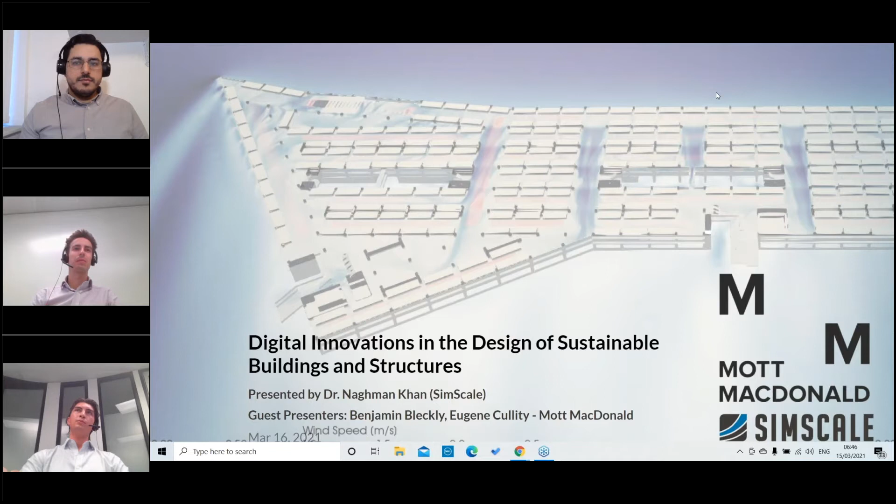But in the past few months, and particularly going into the future with the vaccines being rolled out, I think we're going to see all of that pick up again, because people want to get out, especially governments. We're seeing here in Australia a lot of money injected into building projects, getting things rolling, building infrastructure. So over the next 12 to 18 months, it's really going to pick up again. Great, it's a positive outlook.

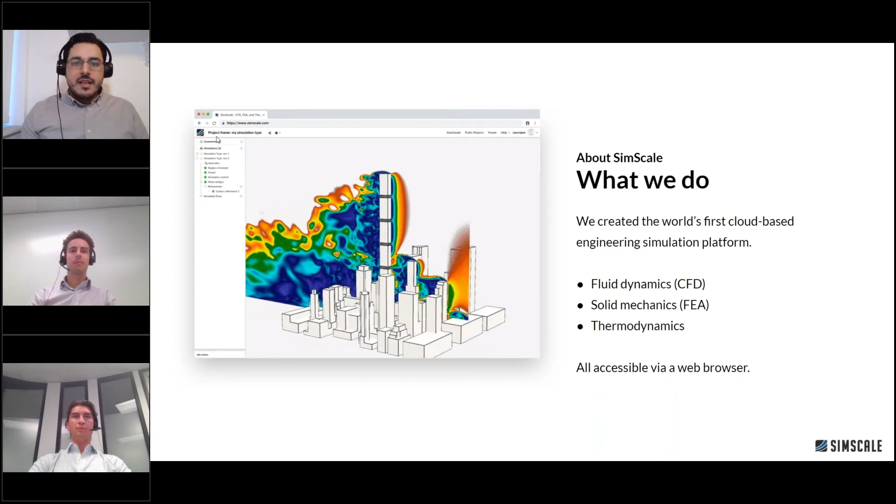Now, why are we here today? Today, we're talking about sustainable buildings and structures, specifically how Mott MacDonald, one of the biggest global engineering consulting firms, uses tools like SimScale and other simulation tools. Ben and Eugene will introduce themselves, and then let's take a look at some of their projects and how they're using simulation.

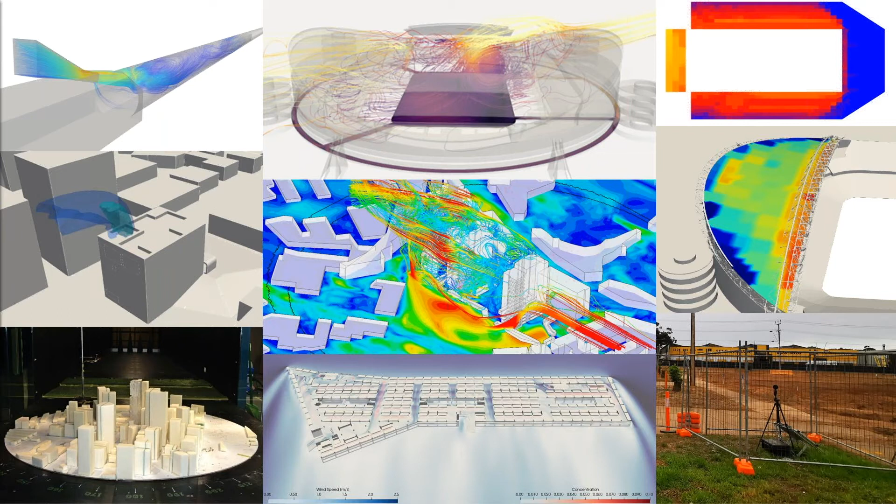With all the development goals within the UN, also linking climate change and everything, we're trying to look at a more sustainable future, and particularly in the built environment, building sustainable buildings, harnessing natural resources, so air movement, temperature, all of that, so we don't need to mechanically ventilate buildings as much. We're not oversizing mechanical plants, and we're really driving down the energy buildings use. So I'm going to jump into some stadium work, looking predominantly at pitch health and internal patron thermal comfort, so we can adapt buildings to achieve a more sustainable and beneficial outcome for clients.

Ben, that was a fantastic slide you showed earlier about the big thinking at Mott MacDonald. I think it's really interesting, everything that you're doing. It represents the depth and breadth of capabilities. Where does simulation fit in to all of that? Not just CFD, but the importance of analysis and simulation tools to help meet all those goals and the different types of analysis you'd have to do at a multidisciplinary team like Mott MacDonald. Perhaps you could comment on that. How important is simulation in general, not just CFD, to everything you're trying to achieve?

Yeah, so if we go back to that slide, you can see CFD and simulations in general link in across all of the sectors that we've got there, so environment, climate, resilience, and it comes in under all of the expertise as well. So you can look at transportation simulations, car movements around car parks, road transport simulations, see how it's going to be used by trucks, buses, cars.

And then in terms of buildings, you can use parametric models as well as CFD models. So you test a large data set of design parameters, assess them against key performance indicators, and that helps you to select a preferred design. Which is typically a better outcome for the client than just running a single CFD model, not iterating through the design, not assessing using simulations, because simulations typically give a more robust, more accurate result, and they're also more time efficient than doing hand calculations and working through projects that way.

Yeah, fantastic. Thank you, Ben.

So moving back onto stadiums and looking at pitch health in particular, any sort of sustainability, one where you want to harness natural elements of the environment. So you got to look at climate analysis. So predominantly this is wind, and we've probably all seen wind roses like this. I know SimScale uses it in the pedestrian wind comfort, so if you use that platform, you'll have seen it.

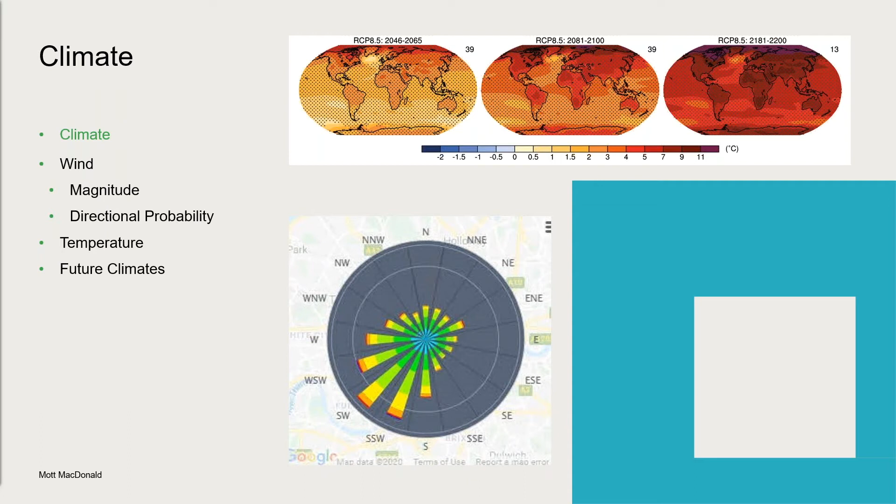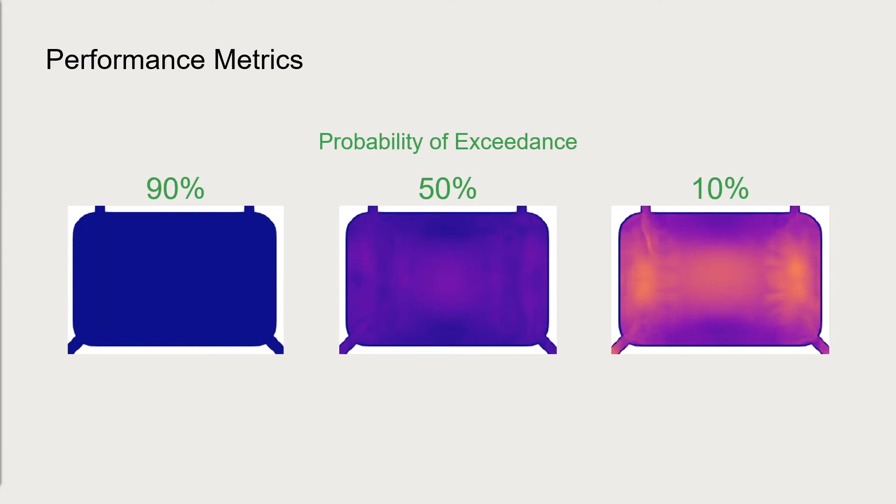So where does this all link into? It comes down to performance metrics, particularly with pitch health. It's not really set what sort of probability exceedance you should be using, but turf suppliers would typically provide you with a wind speed range that's ideal for growing conditions. So we need to pick what probability we're going to use. With 90%, you got lower wind speeds, going up to higher wind speeds at 10%, but what does this actually mean? 90% exceedance, so 90% of your wind speeds are going to be greater than what is shown. 10% probability exceedance, only 10% of your wind speeds are greater than what is shown.

So in terms of looking at an average speed across the turf for an annual year, you're probably looking at around the 50% probability exceedance and trying to run from that. It's also useful to note, say, this is a soccer pitch, or a football pitch for you guys over in the UK. This is looking at 10%, you've got windier sections around the goals and less wind movement along the flanks or the wings there. So if you've got a particularly windy day and you're trying to kick for goal, you're going to have a lot more difficulty, particularly with this stadium design, because you've got stronger winds.

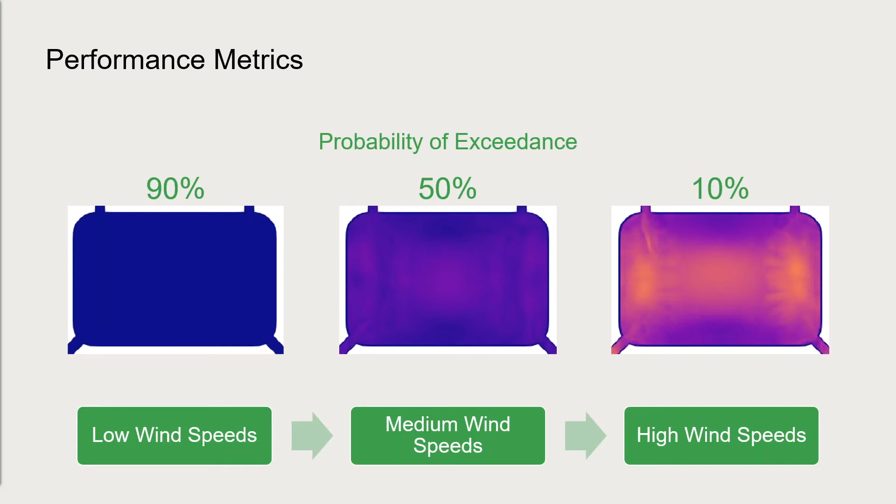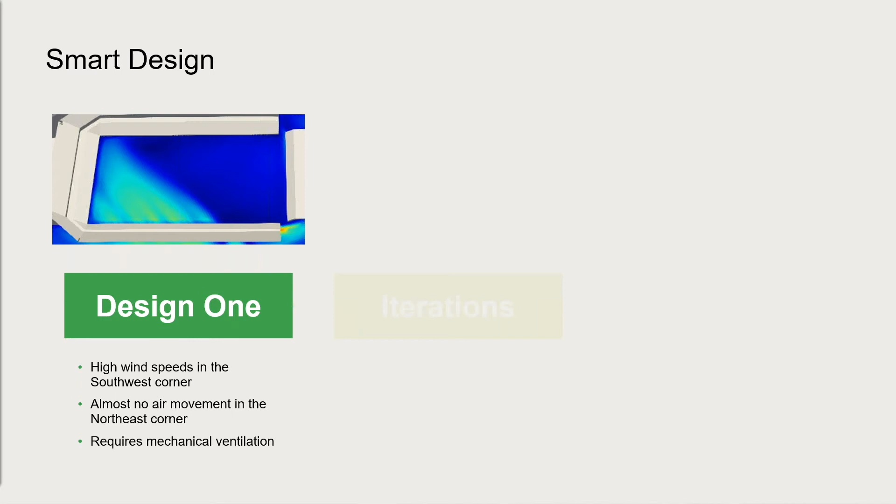You do lots of iterations, you can move on to a better design. So this is just an arbitrary design that comes out of that large data set. You can see we got changed louvre design. So you're using that wind rose, analyzing where the wind's coming from, funneling it onto the pitch. You got a more even spread across the pitch, and therefore you don't need mechanical ventilation, which is a huge cost saver. Ongoing costs are much reduced.

I'm going to pass over to Eugene to talk a bit more about underground stations.

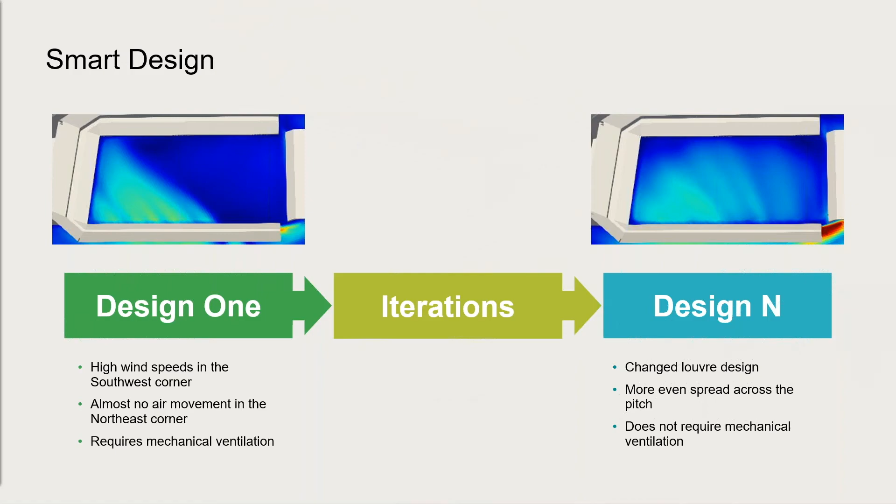Great, thanks, Ben. So I'll be talking a bit about underground stations as a case study for thermal comfort assessments. Like I say, interesting in how complex the thermal conditions are within them. They kind of exist at this intersection between transport network design, building design, and urban planning in a way.

I guess because of the complexity of these projects, there's the opportunity to have a great influence on the project outcomes and sustainability outcomes, of course, through computational engineering, in that the better picture you have of the environment you're looking at, the better and the more optimal your design outcomes are going to be. And I guess that's what we all love to do, working in computational engineering.

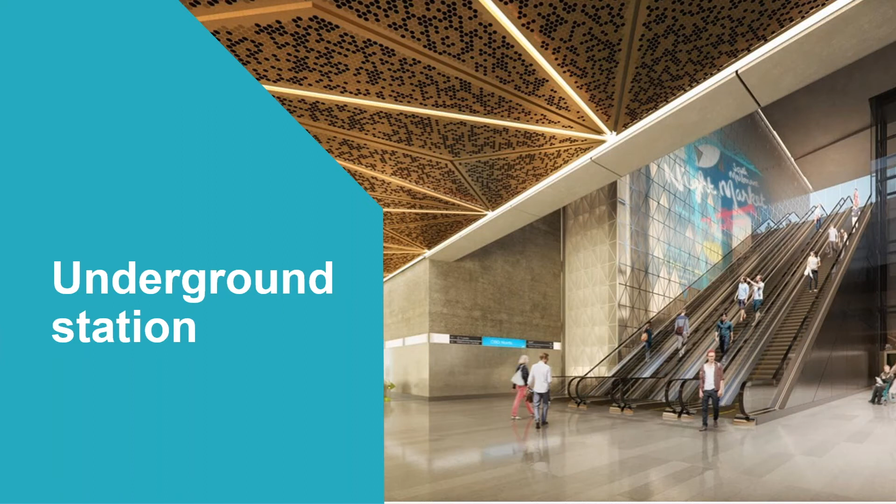So in terms of the problem we're looking at, it's interesting in that you have a lot of different thermal spaces within a station. So stepping off a train, which is a conditioned space, into a platform area, you may be walking through platform screen doors, as shown in that image there, traveling through an escalator into a kind of large open concourse area, which may be open to external conditions, or have this kind of interface with external conditions. And each zone is thermally different.

A person traveling through these zones will go through on a journey essentially, and we don't want that person to experience any thermal shocks. We're at the position now where we can kind of control that person's experience at each point or throughout their stay in the station.

What's interesting as well is you have these very dynamic or transient thermal conditions existing, particularly on the platform space, due to the movement of the trains and the interaction between the tunnel air coming in and out of the platform screen doors, and also your supply air as well.

And the client will want to make sure you can meet very specific criteria that are able to measure comfort in a very dynamic space, and that might be at a specific point in time in a specific location, and it could be looking at the concentration of supply air and the airspeed as well. And I guess the role of the simulation is to get as accurate a picture as you can to actually answer all of these things with confidence.

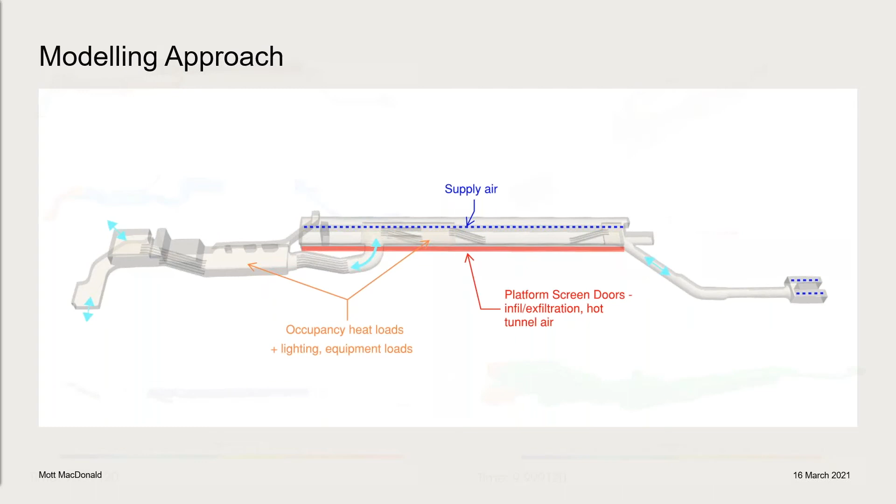So at the end of the day, we're able to provide graphics like this, which when you're measuring supply air concentration, say using a passive scalar, you can then contour by supply air concentration and look at plotting other variables on that. So the graphics are quite an impressive or convincing way of demonstrating that you're actually able to get an accurate picture of what's happening in the space.

Using these methods, we are actually able to tick off every criteria and say, not only are we sure we're getting enough supply air coverage in the area, we can say exactly how much there is at every single point, or what temperature there is at every single time step after the train departs as well.

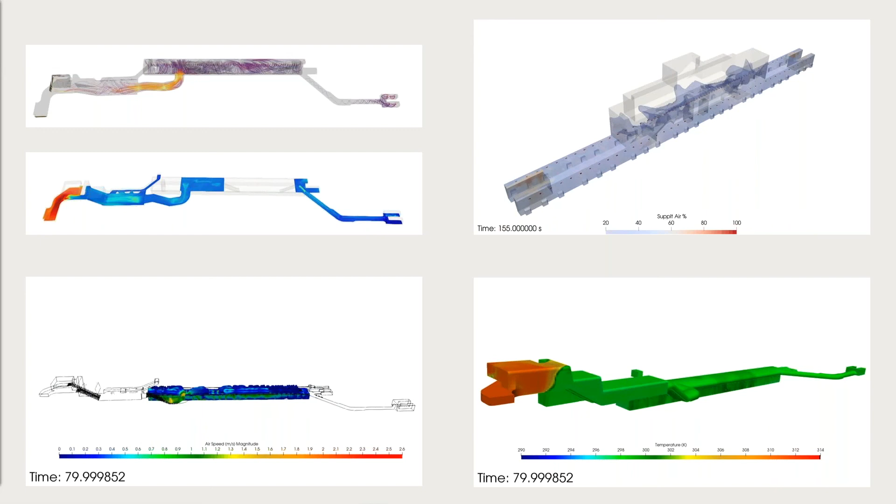And then with this information, you can start reducing your equipment sizing, or increasing your cooling temperatures, and getting your design to a point where you're really on the cusp of an optimal design, which is where you want to be operating in terms of sustainable building design.

So this is a very specific application in terms of the boundary conditions, or the influence of different areas in this space. But I also think this kind of modeling approach can be applied to a lot of other areas where you do have transient conditions. It could be internal and external spaces where you could have gusts of wind which carry external air into a space that you're wanting to condition, or any kind of problem where you have essentially a pool emptying and filling in terms of your conditioned air.

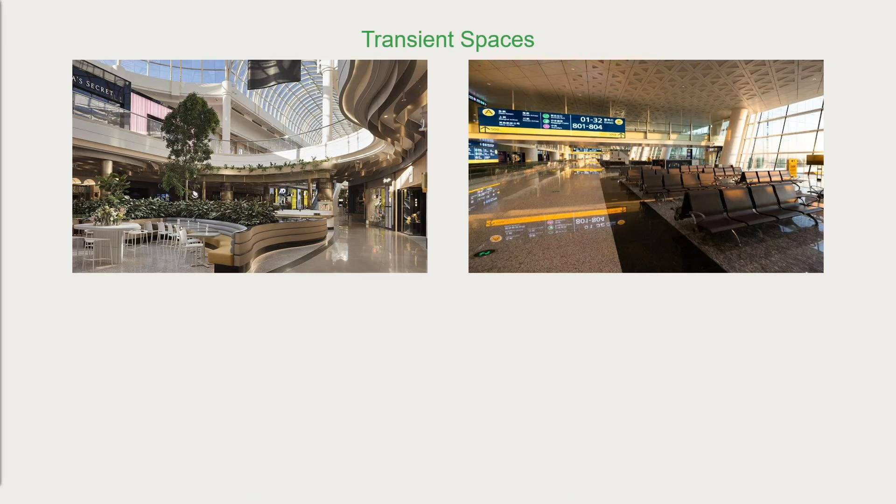A few different variations of how you can get the mixing and dispersion throughout a car park without actually installing the mechanical materials. Another interesting aspect are greenhouses. You can definitely use CFD and simulations to measure and simulate the humidity, temperature, wind environment inside greenhouses, and how the external environment will impact that. So you get the perfect growing situation for the plants, especially if they're not native to your region.

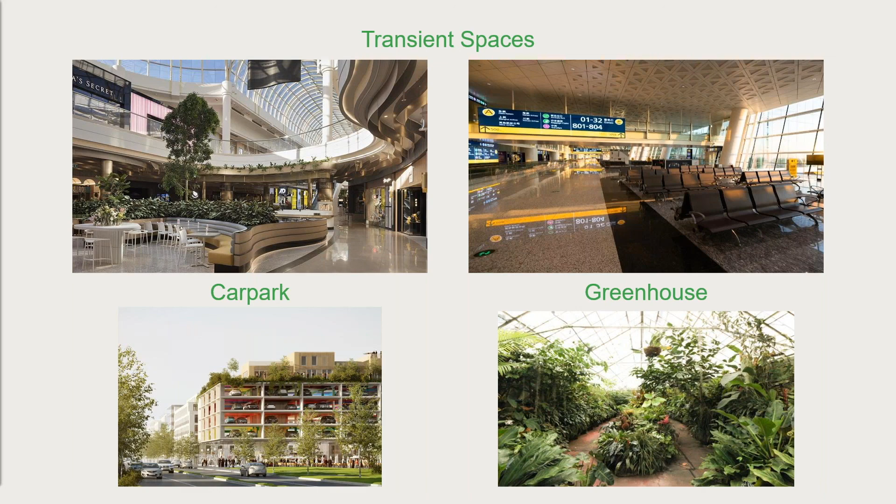What we're going to do now is talk about this part of this webinar series. There's a part 1 and part 2 workshop on thermal comfort, and my colleague Ajit will run through very quickly a short briefing on what that will cover and how you can join this workshop, which is a hands-on workshop. So you can sign up to SimScale, and step by step we're going to take you through setting up a simulation, running a thermal comfort analysis, and I'll hand over to my colleague Ajit to take us through that.